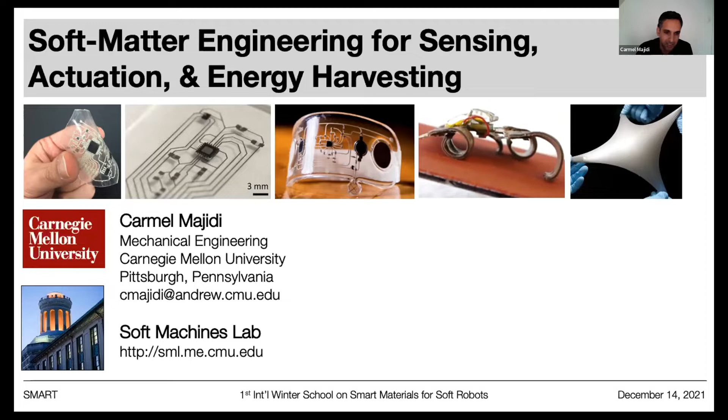First and foremost, I do want to acknowledge my research group, the Soft Machines Lab. Although I won't be spending too much time talking about the work in my lab, I still want to acknowledge all the folks here. This is a pre-pandemic photo - the lab has changed in more ways than one over the last couple of years, and we have some new faces joining the group. But the important thing is that everybody's been able to work together from very different backgrounds. It was a very interdisciplinary group, and that's led to some really exciting collaborations and opportunities.

Just a quick note about Carnegie Mellon. We're in the northeast of the United States, in the city of Pittsburgh. Here's our beautiful campus, situated next to one of the major city parks. Right now we're working out of temporary lab space because our old building got demolished - they're going to be building a new department and lab facility for us. So for the time being we're in this transition stage, but nonetheless we've still been able to stay productive to whatever extent we can over this past period of time during the pandemic.

Just a little bit more about robotics in Pittsburgh more generally. A lot of the exciting things we're seeing within this region have really spun out of work at Carnegie Mellon, and there's a very rich history of robotics at CMU, starting with work, for example, by Marc Raibert on legged robots - basically the platform for the robotic systems at Boston Dynamics. Then there's been a tremendous amount of work with autonomous vehicles, starting with pioneering research using autonomous systems in a nuclear meltdown site, and also with the big DARPA-sponsored challenge in the US for autonomous vehicles, driverless cars, and with humanoid robots, for which CMU has performed well.

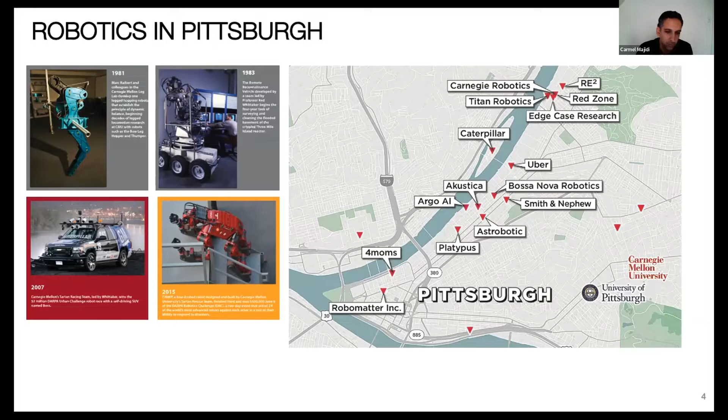Without going through this list in detail, a big thing that stands out is that none of these robotic companies do soft robotics. Soft robotics, although it's gained tremendous attention and made huge impact within academia, is still in its early nascent stages in terms of spinning out into industry and the commercial sector. There have been some really nice highlights - I'll talk about that towards the end of this presentation - on some companies that have been pioneering the use of soft robotics within industry, but there's still tremendous room for opportunity here. Hopefully some of you get inspired to also pursue entrepreneurship and advance some of these material technologies.

Okay, so like I said, there has been really big impact. This is a graphic from a review paper that I was involved in with Elliot Hawkes and Mike Tolley.

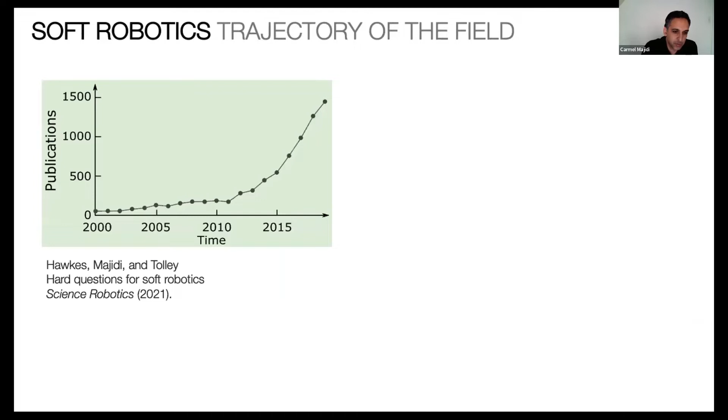By every metric, there's been tremendous interest and growth in recent years in soft robotics, and there's a variety of reasons why. I won't get into all those details, but on the left you see this exponential increase in journal publications, and on the right we see this really impressive rise in

The growth of companies. By the way, just real quick, I have this bar I can't make go away in Zoom that's obscuring the top of my screen. I don't know if on your guys' end you're able to see the title bar, or is it being obscured? Yes, we can see the title, which is Soft Robotics Trajectory of the Field. Oh fantastic, okay great, awesome.

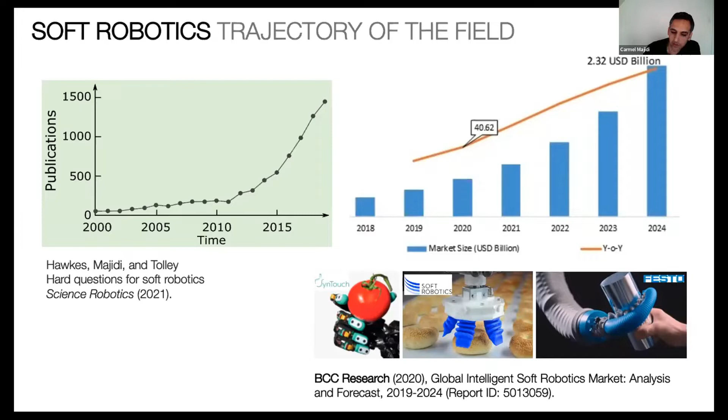So anyways, we'll get back to what this growth means for the field, and also how you can leverage this and take advantage in your own efforts. Before I delve into the main content of this workshop presentation, I do want to make a few high-level comments about basically, are soft robots robots.

I'm not really the best qualified to make this assessment. My PhD training was within a robotics lab, but it's such a broad and diverse field, I don't know that anybody within soft robotics—I'm sure there's a few out there who can probably have much stronger ideas about what they view as a robot versus not. What I can do is reference: in the United States, we have our National Science Foundation, one of the premier funding agencies for academic research, and they do have a clear definition of a robot.

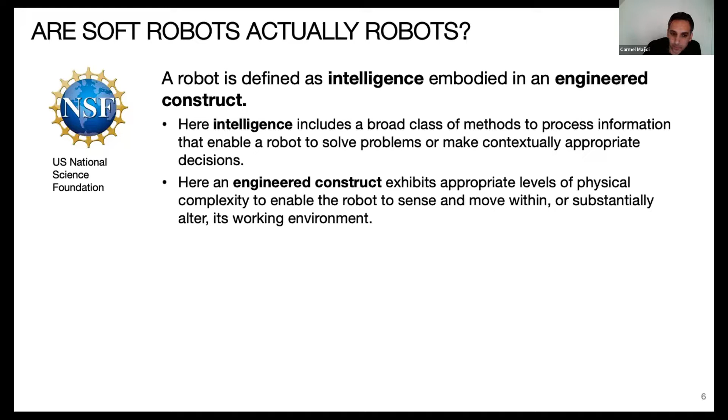What they define a robot to be is basically intelligence embodied in an engineered construct. Intelligence is what you'd expect within a robotics context: the ability to solve problems and make contextually appropriate decisions, process information—so there's a sensing and processing element to it. And the engineered construct relates to the physical embodiment of the robot, its ability to sense and move in an environment, and in some cases alter or perform work on its environment.

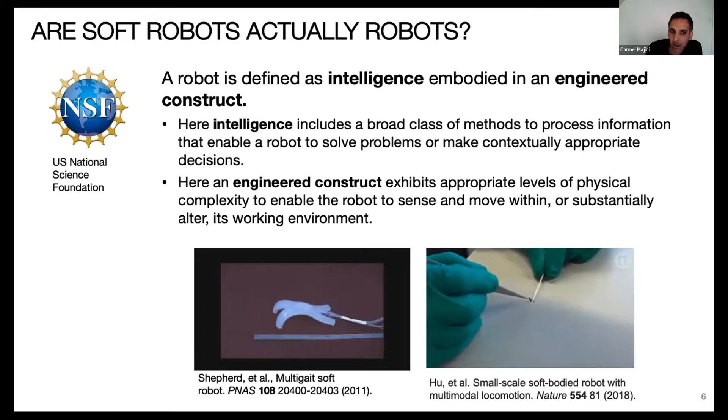It's up to you to decide whether some of the soft robotic systems we've seen within the literature really satisfy this definition of both intelligence and an engineered construct. Certainly these are engineered constructs, and I think they're certainly capable of moving, but the question is, do they satisfy this definition of intelligence?

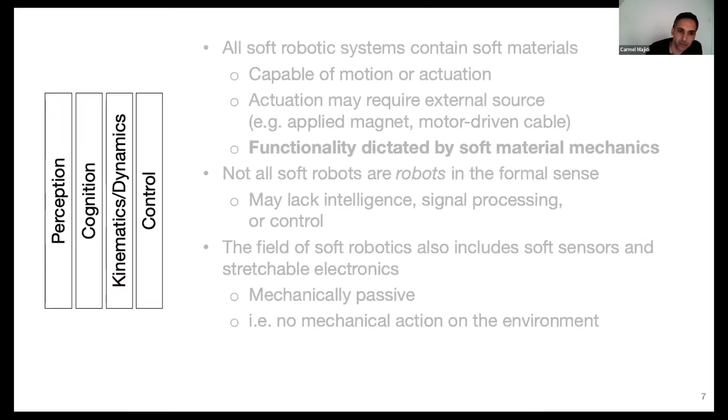Going further, we can think about conventional robotics and the scientific or disciplinary foundations of the field—the different pillars of robotics: perception, cognition, control, kinematics, and of course mechatronics, which features as a very important pillar within the field.

When it comes to soft robotics, a lot of these elements do remain pillars of the field, but there is, of course, this strong emphasis on the use of soft materials. I'd say in bold that a distinguishing feature of soft robotic systems is that functionality is dictated by the mechanics and physics of those soft materials.

I'd go further and say that not all soft robots are robots, at least not in the formal sense as defined by the US National Science Foundation. In some cases they may lack intelligence, they might lack signal processing or the ability for control. You could argue that a lot of that intelligence and control and processing is embodied in the soft material itself and in its ability to deform, and that's a legitimate claim to make. Whether other roboticists would accept that is very much case by case, or depends on the particular subfields.

What I would say though is that there are plenty of embodiments within soft robotics, such as soft sensors and stretchable electronics, that I think we can all agree are not in and of themselves robots. We can call them robotic materials, but these are like stretch circuits that are mechanically passive. They're not performing any mechanical action on the environment, they're not capable of any kind of motion on their own, but they're highly deformable, multifunctional, and capable of other types of electronic and sensing functionality.

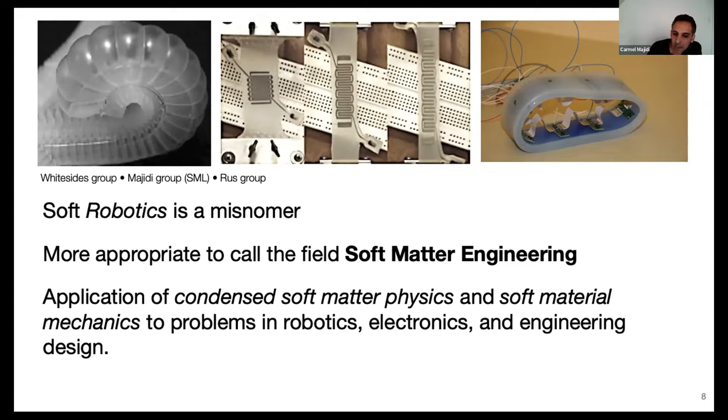I'll talk a little about what I mean by soft matter engineering. It really involves applications of condensed soft matter physics and soft material mechanics to problems in robotics, electronics, and engineering design. So even going beyond more conventional robotics applications or more formal definitions of robotics, it really is engineering applications of condensed soft matter physics.

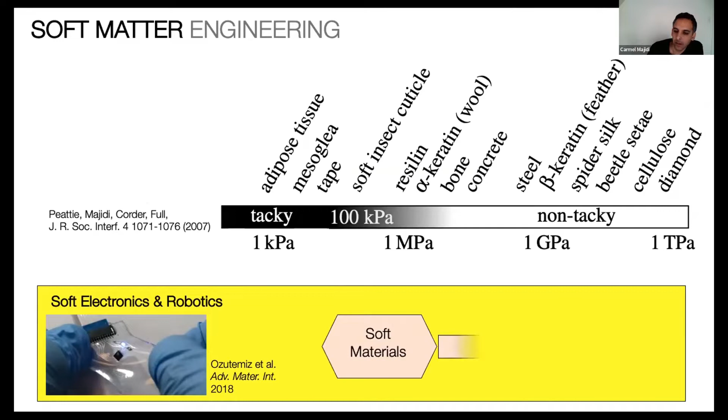Okay, so what do we mean by soft? There's plenty of metrics by which we can distinguish between the stiffness, rigidity, or compliance and softness of a material, Young's modulus being just one of many different types of metrics. At a high level, soft matter engineering is really about taking materials that are on the soft end of the spectrum and integrating them in ways that they exhibit functionalities that we more typically associate with more rigid, stiffer materials.

A challenge with integrating is that inevitably you are going to have cases of mismatches in size, shape, and stiffness of the materials. So something that really stands out in soft matter engineering are the challenges with manufacturing, having these material architectures, systems, and devices that are highly heterogeneous in terms of all the different types of materials that have to be robustly integrated.

Effectively, overall, globally, you would want these systems still to exhibit a lot of the functionalities we see here, right? These are common among soft biological tissue and organisms as well. Ultimately, we want things that are soft and deformable and satisfy a lot of the requirements we need for applications in soft robotics.

Let's see, there's some questions here. Looks like there's a question about what percentage of soft materials make a soft robot? And it looks like Mark Cutkosky talked about selectively soft robots that combine both soft and rigid materials.

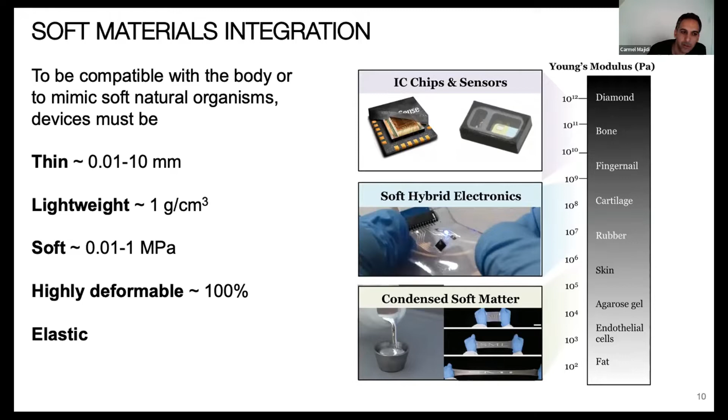What I would say, going back to my earlier definition: I would call it a soft robot if its functionality is primarily dictated by the mechanics of the soft material. If you're using soft materials just for the joints and the rest of the body is piecewise rigid, I wouldn't call that a soft robot.

Yes, the deformation and mechanics of those joints certainly do contribute to the overall kinematics and mobility of the robot, but they're not the primary influence on the mechanics, because those piecewise rigid systems' kinematics and mechanics are also largely governed by the rigid elements as well.

And so you can have soft robotic materials that are incorporated into these hybrid robotic systems. I wouldn't call the full robot implementation a soft robot, but I would say that it incorporates soft robotic elements. I think that speaks to what Mark Cutkosky had been talking about.

I would also recognize that as an important trend within the field of bio-inspired robotics, where we're seeing this broadening of material systems - it's not just all made out of soft materials and fluids and granular matter, but also has a rigid backbone, right? It has a skeleton or rigid elements distributed throughout. So yeah, I would say that incorporates soft robotic materials, but those I wouldn't necessarily call on their own soft robots.

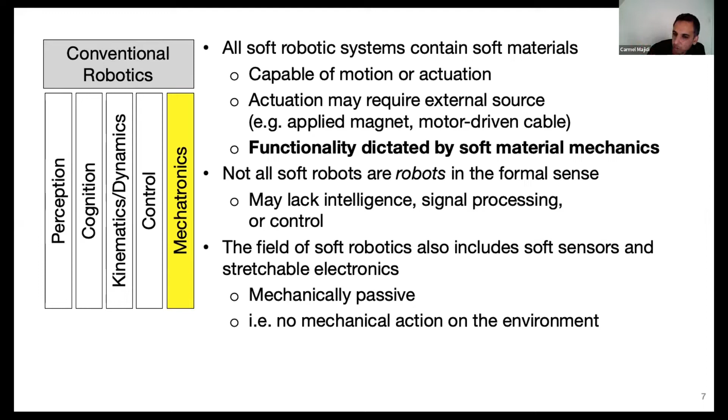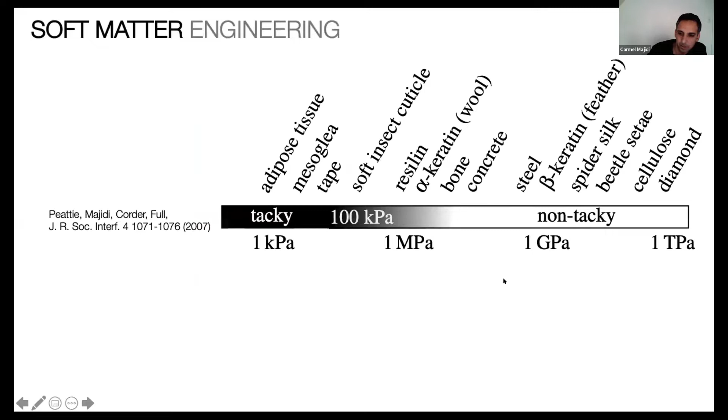So for the agenda, I'll do a quick overview of what I think of as soft robotic materials. Really the core of this is going to be looking at the mechanics and thermodynamics of soft robotic materials. This is going to get into the weeds a bit, into the underlying principles. Apologies in advance if this is either already very familiar to you or you're just not interested in this topic.

I'll also do my best to get through slides on a little bit of the current work in my research group. And then I want to close out by making a few remarks about the prospects for entrepreneurship and commercialization within the field of soft robotics and robotic materials.

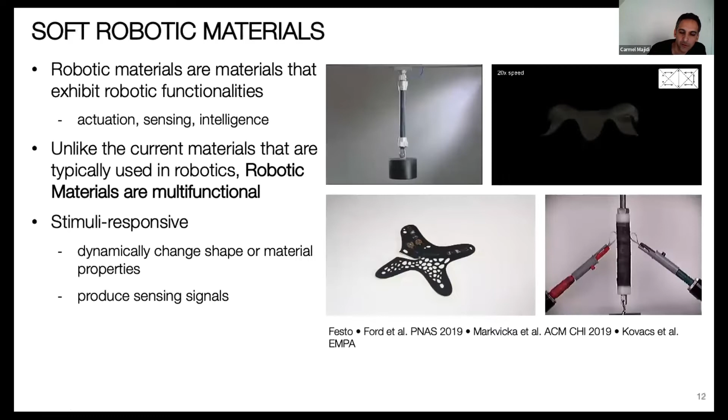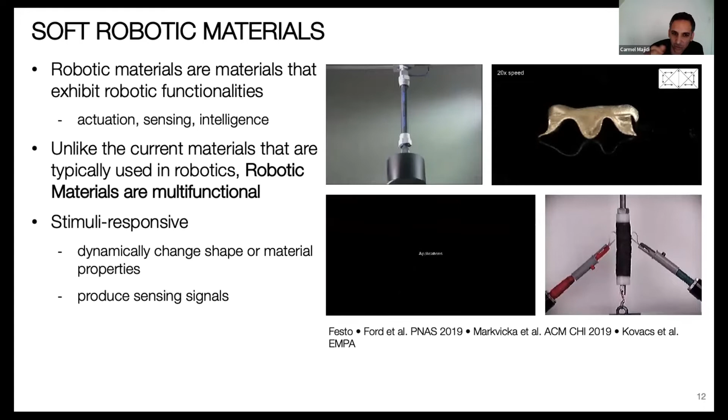Okay, real quick, an overview of soft robotic materials. I'd say that robotic materials, more broadly speaking, at least as treated in the literature, relates to materials that exhibit quote robotic functionality. That's a bit of a circular definition, but by robotic I think we generally know what we mean: materials that are multifunctional, that have the capabilities of actuation, sensing, and/or signal processing and intelligence. This covers everything from stretch circuitry with embedded microprocessors to soft robot tactile skins to all sorts of different types of soft actuators.

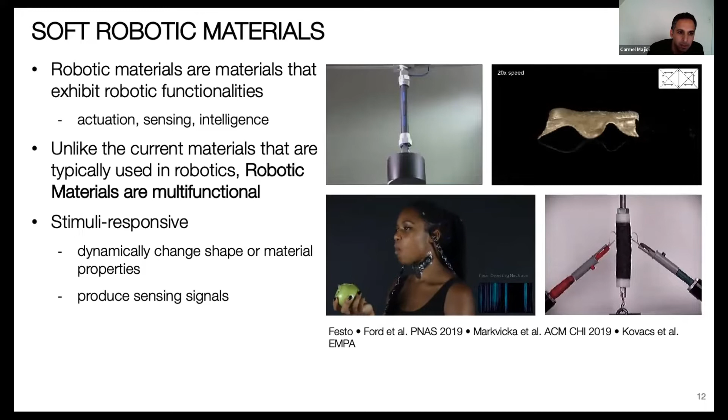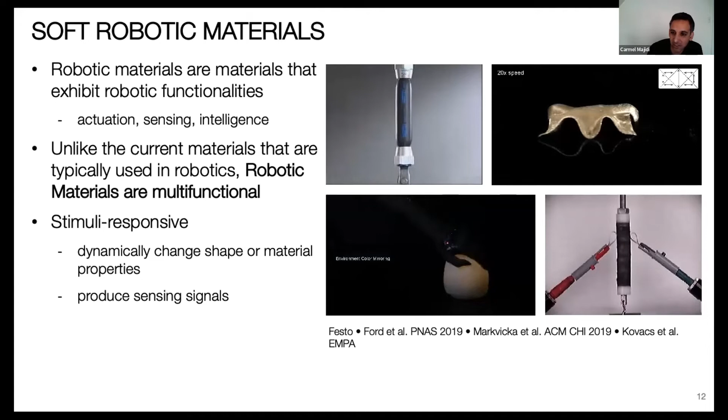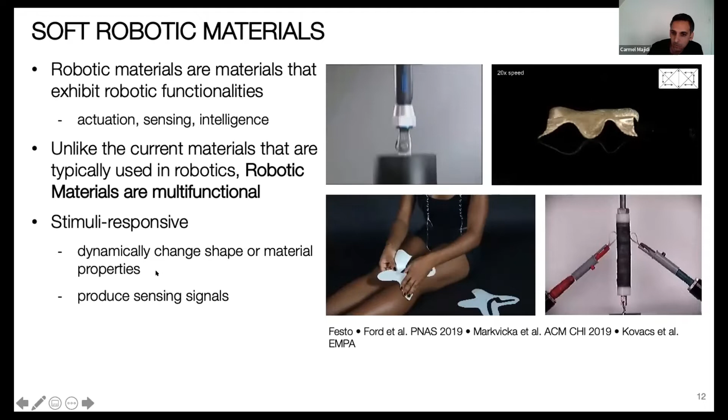This is in contrast to a lot of the more conventional materials used in robotics that are single purpose. They're not multifunctional, in the sense that they're only there to function as a hinge, or as a casing, or as a load-bearing element. Generally what I'd say about soft robotic materials is that they're all stimuli responsive - either actuators that move, change shape, or change stiffness in response to stimuli, or sensors that produce some kind of signal in response to some stimulation or sensor input.

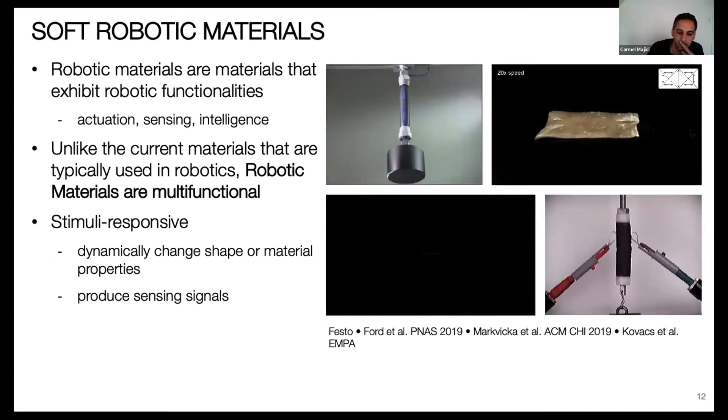A great resource here is this paper by Kaushik Bhattacharya and Dick James in Science, where they argue for a new way of thinking about multifunctional materials, where the material is the machine. This paper came out well before the current interest in soft robotics, and it's been a big source of inspiration to my group.

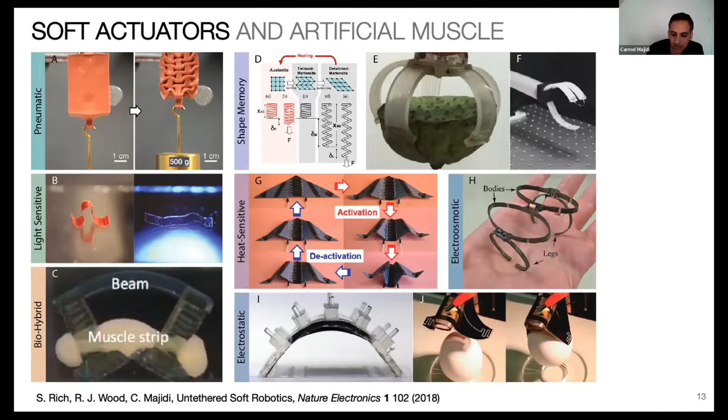This is just a data dump of a variety of different material architectures used in soft actuators and artificial muscle. I'm not going to go through these - you'll probably be familiar with most. Apologies that I don't have the names of all the research groups associated with each of these subfigures, so I'd ask you to reference that review paper at the bottom for more details on the references.

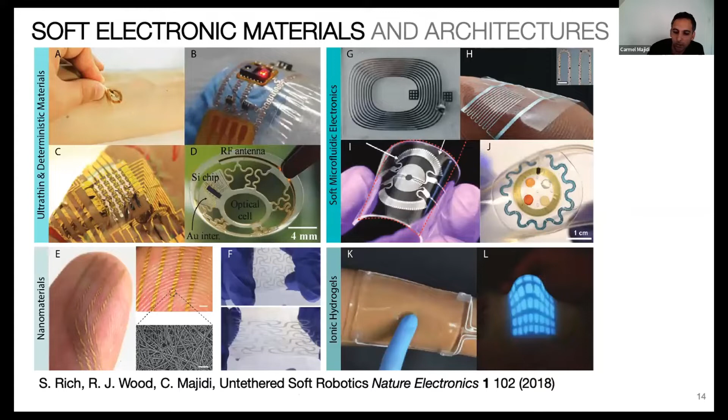Likewise, in soft electronics and sensors, again we see a wide range of different material architectures here. Okay, so...

Thinking about soft matter engineering now as basically a foundation to create these robotic materials, I'd say to think about it holistically - not just about material architectures and compositions, but also manufacturing methods, material synthesis techniques, and also the underlying principles in terms of design and modeling, and the underlying physics of these material systems.

This broader framework of what I'm calling soft matter engineering for robotic materials has its scientific foundations in fields like condensed soft matter physics, material science and chemistry - which I would include polymer science and polymer engineering - thermodynamics and mechanics of materials, which is what I want to focus on for this talk, and also advanced manufacturing techniques, which I would include microfabrication, nanotechnology, and soft lithography.

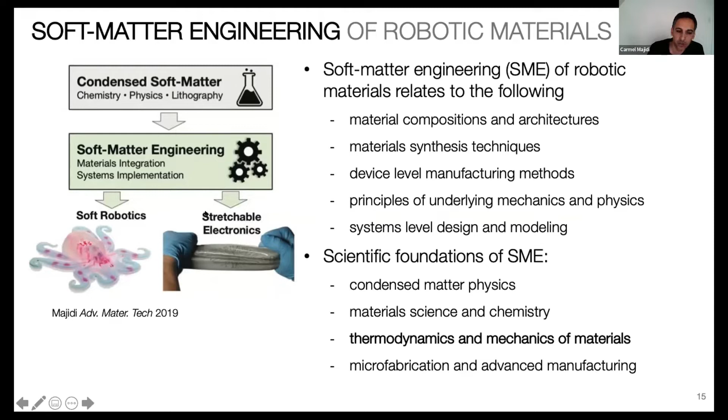So these, in my mind, are the scientific foundations, and really soft matter engineering is a field of applied science where we're applying these scientific principles and methods to applications in stretchable electronics, soft robotics, and other domains related to robotics.

Okay, so what are the types of materials that we typically work with?

A lot of you are familiar with the different types of silicones, rubbers, and elastomers. There's also urethanes, fluoropolymers, and a whole host of other materials typically used. When it comes to elastomers, we can divide them into thermosets and thermoplastics, and the thermoplastics that are really popular in soft robotics are often block copolymers.

When it comes to copolymers, you can engineer these in all sorts of ways. You can graft in functional groups like conductive components such as PANI or PEDOT, and tailor the electrical and thermal properties of these materials.

There's also shape memory polymers out there, materials like liquid crystal elastomer, LCE, that are becoming popular in soft robotics. One common feature is that almost always you see a soft elastomer as the carrier medium, and the elastomer itself could be mechanically passive, or it could have shape memory properties, or be tailored to have various conductivity.

Soft robotic materials also typically have some kind of embedded active matter, and by active matter I mean this very broadly. It could just be the air you pump into a McKibben actuator, a gas, a fluid. It could be granular media used today for particle jamming and stiffness tuning. It could be conductive powder mixed in to create percolating networks for electrical conductivity.

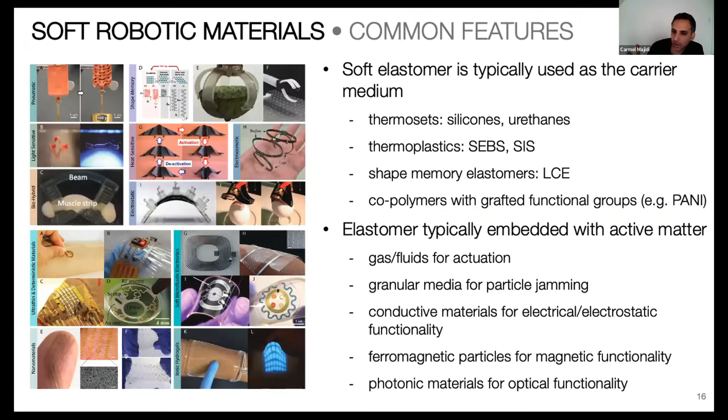So this is at a really high level what I think about when considering the different types of soft matter that go into these robotic materials. In terms of applications, you've been seeing throughout the workshop how these material systems are used for tactile skins, artificial skins, stretchable electronics, and artificial nervous tissue.

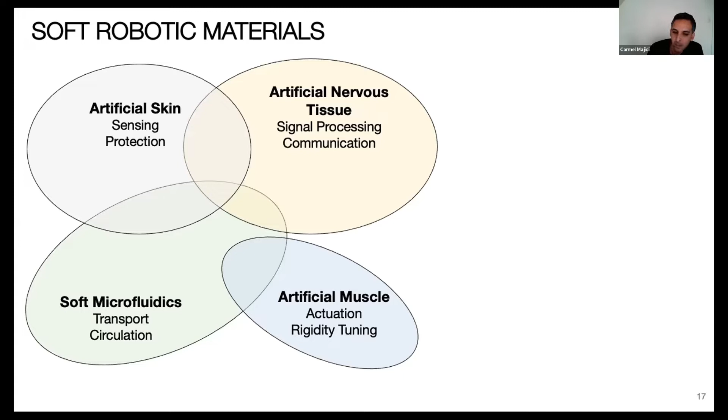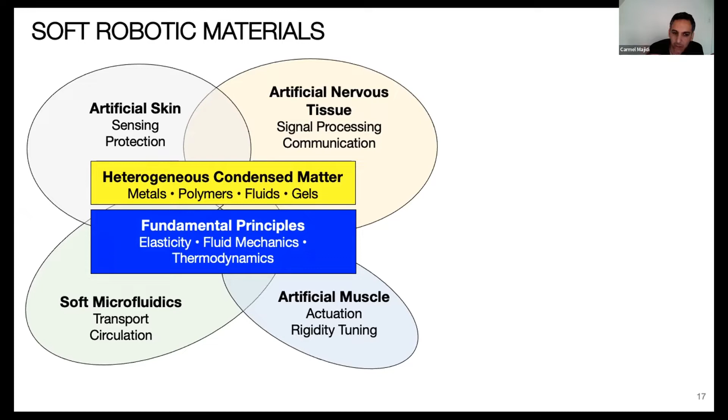There's plenty of exciting uses of soft microfluidics, biohybrid type systems, and soft actuators and artificial muscle. I'd say the common feature in all these application domains is this utilization of heterogeneous combinations of various types of condensed soft matter, and that application of condensed matter physics has a foundation in these various fundamental principles.

So what I want to touch on next is how we use these principles of mechanics and thermodynamics to gain insights into the design and operation of these robotic materials. These principles can be applied to a wide range of material systems, and I'll touch on a few in particular—pneumatics, electrostatics, and ferromagnetics—but they can also be applied to other material systems as well.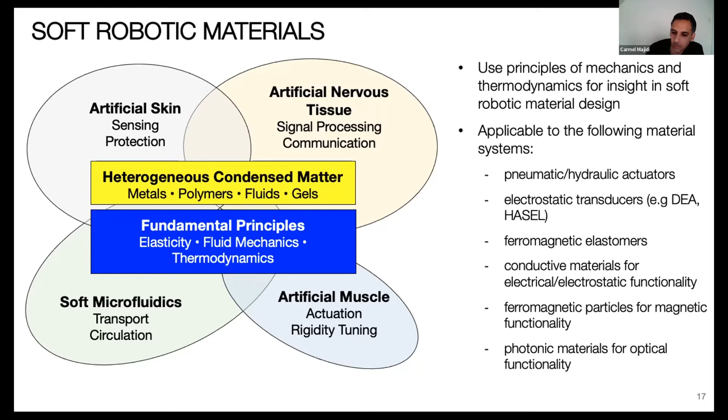Okay, moving on here, and apologies, I'm kind of rushing through these topics. I'm trying to cram a lot in, but really this portion is the heart of the presentation. Fair warning, this may be a little different than some of the other presentations, in that it's going to be almost lecture style—this is adapted from content I teach in some graduate level classes on soft robotics and mechanics of soft systems at CMU.

All right, so going back to how materials are presently used in robotics more generally—there's a wide range of different engineering materials, and we can classify them based on their stress-strain behaviors.

There's of course the stiffer plastics and metals that are the load-bearing elements or used as housing in robotic systems, and they tend to have a very steep curve when plotting stress versus strain. At the other end of the spectrum, we have softer materials like these elastomers that have a much more shallow slope and can allow for much higher strains.

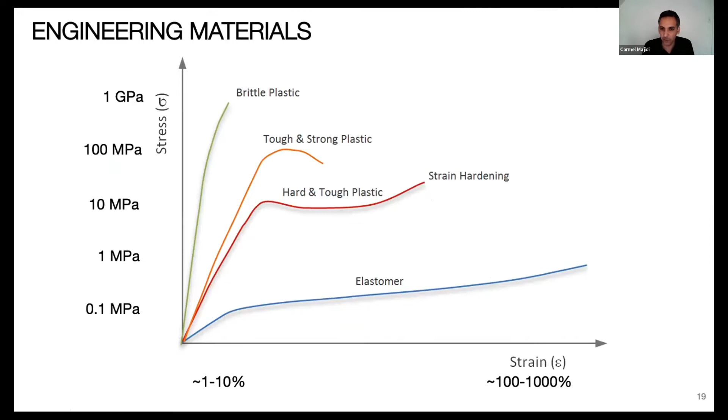Okay, so that gives a fairly wide picture of the different types of materials. If you wanted to distill things down to one metric, when comparing the softness or stiffness of these materials, there's Young's modulus, which scales with the amount of force or stress it takes to strain a material. I find that a very useful metric for comparing softness. In soft robotics, typically we work with materials that have a modulus on the order of hundreds of kilopascals, at most maybe a few megapascals. These are materials that are fairly elastic, and can be strained anywhere from 100 to 1,000%.

Going back to the earlier question about hybrid systems mixing soft materials with rigid materials, by my definition, for the whole thing to be called a soft robot, the overall system effectively has to have this degree of compliance and deformability. Otherwise, it's just a robotic system that has soft robotic components within it.

Another metric sometimes used to talk about the hardness or softness of a material is shore hardness. There are actually different standards for shore hardness - I'm not going to go into the details here. I just generally find this a much more confusing way to represent the stiffness of a material. But unfortunately, if you look at data sheets from distributors and suppliers of engineering materials, instead of reporting Young's modulus, they'll report a shore hardness, and sometimes they won't even tell you what the specific standard is, so you have to infer that on your own based on context.

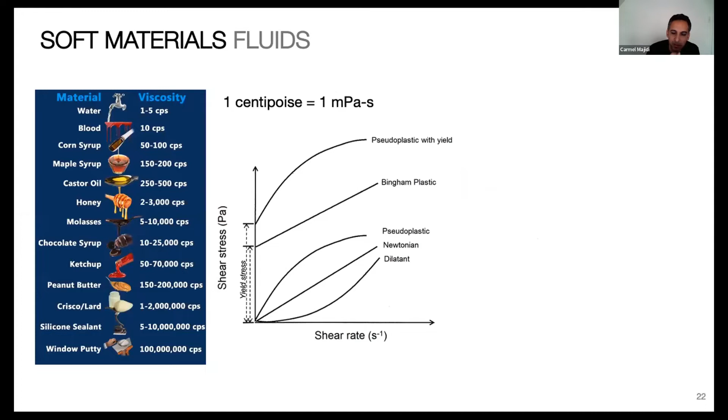So I've been talking about elastomers and kind of solids, but in soft robotics, we also care a lot about fluids. For that, instead of using Young's modulus or shore hardness, we talk about viscosity and different features of the rheology of these materials. There's certainly a very prominent role for different types of fluids in soft robotics.

So here's just one example on the top of a liquid metal alloy that's kind of commonly used for soft skins and stretchable electronics.

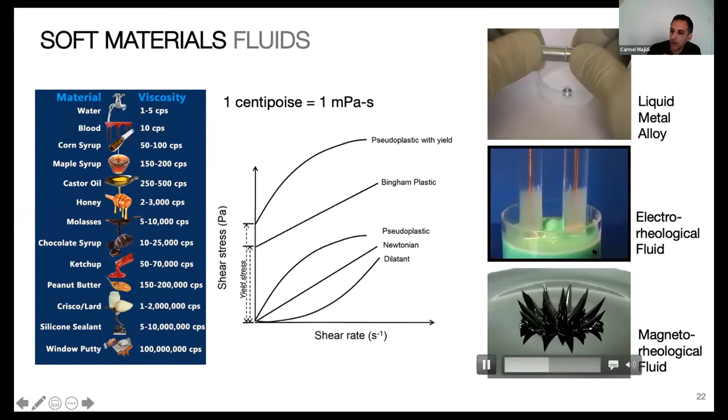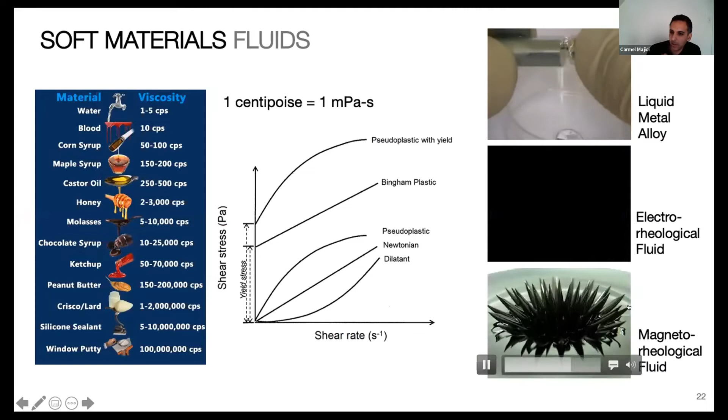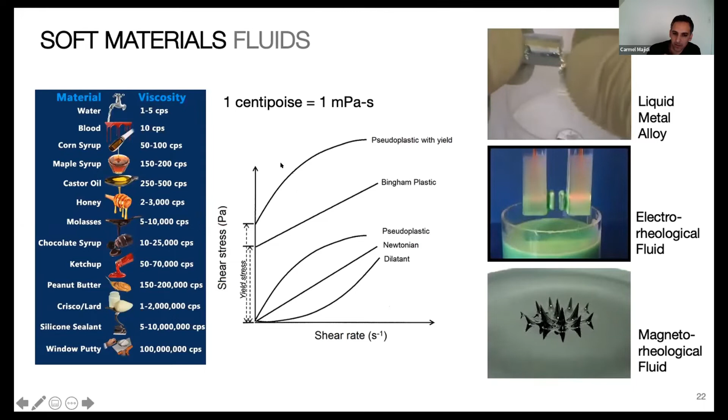I haven't seen as much work within soft robotics, but there's been decades of research on electrorheological fluids and magnetorheological fluids that have these phase-changing and stiffness-tuning properties in response to either electrical stimulation or magnetic field. Ultimately, you can model and evaluate the rheology of these materials in the context of these typical behaviors, looking at the shear stress of the material as a function of shear rate.

Okay, so going back to soft robotic materials and really delving now into the heart of this workshop—we're like 30 minutes in, and I'm finally getting to the main point here—is that for virtually any, in principle for any soft robotic material system, we can always examine the mechanics and physics from a thermodynamic standpoint.

We can always define a Gibbs free energy of the system, and we know that the Gibbs free energy is going to be subject to the first and second laws of thermodynamics. So for a lot of these material systems, the Gibbs free energy is going to be related to the Helmholtz free energy and also the mechanical work associated with that system.

When it comes to Helmholtz free energy, there's going to be an internal chemical bonding energy component, or just an internal energy component. And then there's also going to be a system entropy component to Helmholtz.

With mechanical work, this can come from a lot of different sources. It could come from external loading, like a dead load, but that mechanical work can also come from internal air pressure, or from the Maxwell stresses induced by electrostatic charge, or from body forces from gravity or from electromagnetic fields. So this mechanical work can be a lot more than just surface tractions and mechanical forces—it can come from other sources as well.

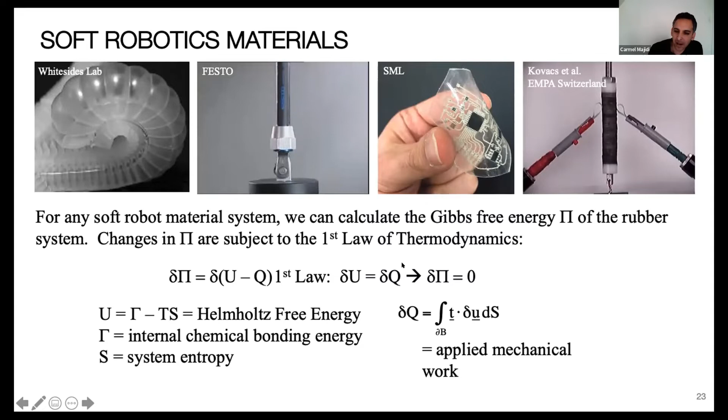Okay, so what we know from the first law is that in a closed system, the Gibbs free energy remains stationary. So we have energy conserved within our system, and knowing that the two main contributions are work and Helmholtz free energy, what that means is that any change in Helmholtz free energy has to be balanced by a corresponding change in mechanical work performed on the system.

Okay, so that principle of stationary potential is represented here when we look at the Gibbs free energy as a function of whatever variable we're defining as the state of the system. So if we're looking at our soft robotic system and how the radius, the inflation diameter, changes, then that would be the independent variable here that can change.

Or maybe it's the length of elongation of our actuator, or maybe it's the amount of charge stored within our electrostatic transducer. Regardless of what that independent state variable is, we can always come up with this plot or manifold of potential energy as a function of those independent variables. And what we find from the first law of thermodynamics is that the slope has to be zero at static equilibrium—the potential energy has to be stationary. So basically that's another way of saying that energy is conserved.

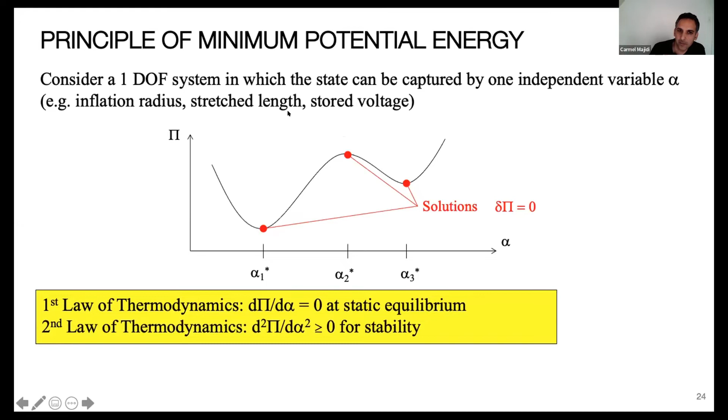The second law of thermodynamics, which relates to entropy in our system, dictates that the Gibbs free energy has to be minimized, so the second derivative of that potential energy has to be greater than or equal to zero. I call this the principle of minimum potential energy, because within mechanics and soft robotics, instead of calling it Gibbs free energy, we call it potential energy of the system.

What I just showed is for a single, one degree of freedom system, but this could just as well be applied to multi-degree of freedom systems, where you have length, radius, wall thickness, voltage, and a bunch of different variables that can independently vary. In those cases, you have to make sure that our Gibbs free energy is minimized with respect to all of those different variables.

Sometimes the variables could not be scalars, but could be functions or tensors. Your unknown variable could be the strain field throughout the entire material, or it could be the electric field or electric displacement. In those cases, it's not just one scalar value like a length, it's going to be strain - an infinite number of strain values at all the different points within your elastic body.

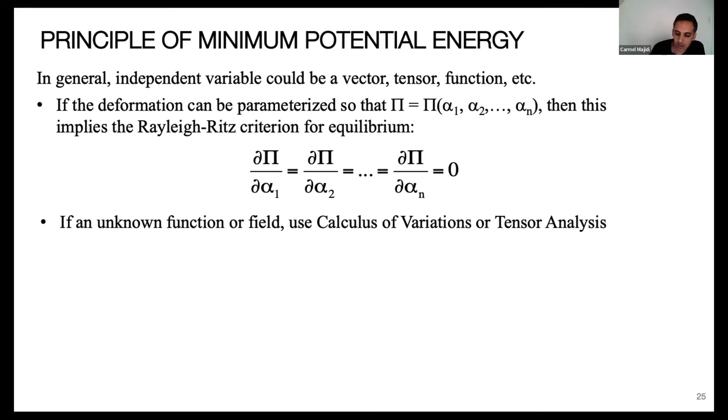For that, instead of using this Rayleigh-Ritz formulation, we have to use calculus of variations in the case of scalar functions, and more generally tensor analysis and differential geometry when it comes to vectors and tensors that are free variables. So what I'm going to show is how these variational principles can be applied to a variety of problems in soft robotics. I'll just very quickly touch on these two different cases.

Starting with how we can go from the first and second laws of thermodynamics to deriving a constitutive model for a hyperelastic solid. Then, using these same techniques, we can see that they can be applied to McKibben actuators, dielectric elastomer actuators, and also looking at ferromagnetic systems.

This is really what I advocate above anything else: if you want to study the mechanics and physics of soft robotic systems, use these energy minimization techniques. Don't waste your time with stress strain approaches or other methods. I'd even say don't waste your time with finite element analysis unless you know specifically what that design is, what all the dimensions are, and what all the materials are - in those cases, sure, plug things into FEA and get your solution that way. But if you're still in the early stages of design and don't know the dimensions, geometry, or materials, use these energy principles to get a back-of-the-envelope ballpark intuition for what the important governing physics of your system are.

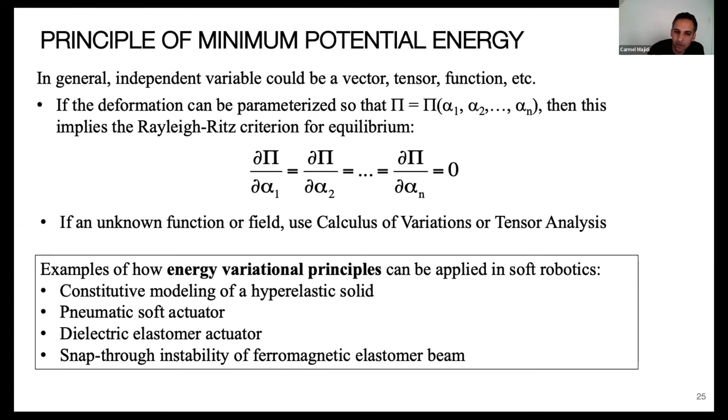So when it comes to hyperelasticity, how do these energy principles play out? Let's just look at the most popular material in soft robotics - let's take a look at silicone, or more specifically polydimethyl siloxane, these platinum cured silicones.

They have all sorts of different brand names, everything from Sylgard 184 to all the EcoFlex products - at least in the States we have the company Smooth-On, plus all sorts of different vendors and suppliers and different molecular weight ratios, cross-linking densities, additives, and all that stuff.

But basically the underlying principle here is the same: we have this loose network of polysiloxane chains. Each of these polysiloxane chains is composed of siloxane monomers, and these units within our polymer chain can, we assume, freely rotate with respect to each other. Periodically we have these covalent bonds, these cross-links that connect adjacent chains, and it's really those cross-links between the chains that give the rubber its material elastic integrity.

What makes it resistant to mechanical deformation is actually a very interesting principle that's really steeped in the entropy of these material systems. So it does go back to this representation in terms of a Helmholtz free energy and a Gibbs free energy for the system.

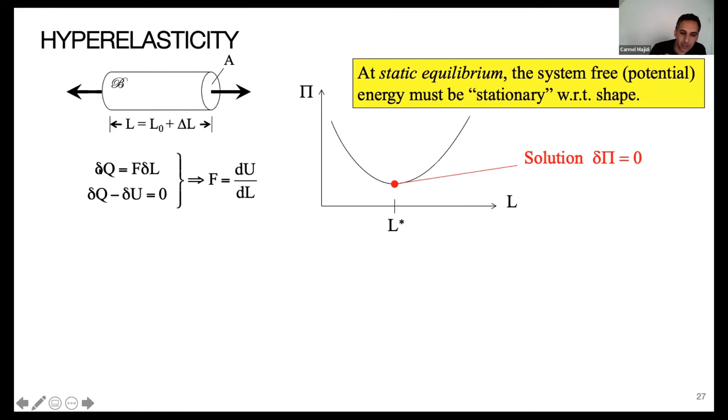And then to basically get the force required to stretch the material, we go back to that energy balance to relate mechanical work to the corresponding change in Helmholtz free energy.

Assuming that the covalent bonds within our polymer aren't really stressed that much and maintain the same length, the deformation of these soft material systems is largely governed by the unwinding or uncoiling of these polymer chains, or the rotation of adjacent monomers. In that case, the change in Helmholtz free energy just corresponds to the change in entropy of the system.

When we think about entropy, again we think about all the different possible configurations that each macromolecular chain, each polymer chain, can adopt. Boltzmann's constant factors into this as well for getting that entropy. And then when we look at what is the entropy, what are all those different possible configurations, for that we turn to statistical mechanics.

From that, we can get this simple expression that relates entropy with the overall volume of material that we have, with X, Y, and Z dimensions. It also has values like the total number of polymer chains, Boltzmann's constant, the root mean squared average of the end-to-end distance of an average chain, and this value M naught, which corresponds to the number of possible configurations a chain could have in the special case when the two ends are touching each other.

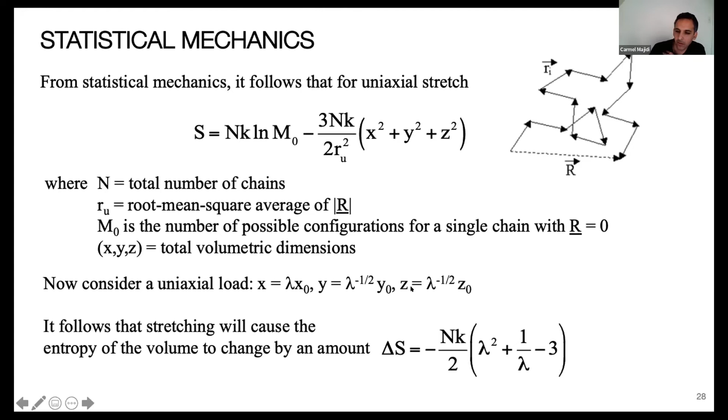Based on that, we end up with this kind of representation. If we now take this volume and deform it, we can relate those dimensions, the X, Y, Z components of the volume, with stretch. In the case of uniaxial loading, we stretch along the X direction, which means we have to contract along the Y and Z. We get the corresponding change in entropy, plug this back into our energy balance.

That gives us a relationship between force and stretch that turns out to have a form that looks like our familiar expression for a neo-Hookean solid. So this is the foundation of hyperelasticity, all originating from principles of thermodynamics and statistical mechanics, where we have this coefficient of elasticity C1 that's related to all these intrinsic properties of our polymer.

We can take this and generalize it. This is just a very simple application of statistical mechanics, and we can make this fancier. There's the Arruda-Boyce model that Mary Boyce and Ellen Arruda developed, which takes a similar approach but ends up with a much more accurate constitutive model for stress versus strain, or stress versus stretch.

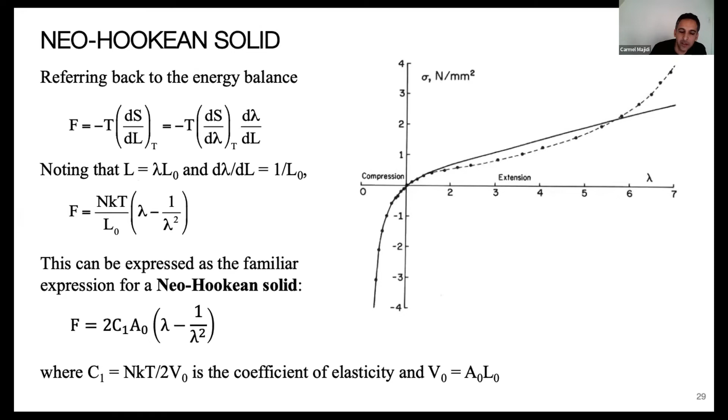What's also significant is that from that entropy we get our Helmholtz free energy, and from the Helmholtz free energy we get our elastic strain energy density, which sometimes appears as W in the literature. So now, empowered with this value, we can do all of these robotic systems and come up with an expression for our Gibbs free energy.

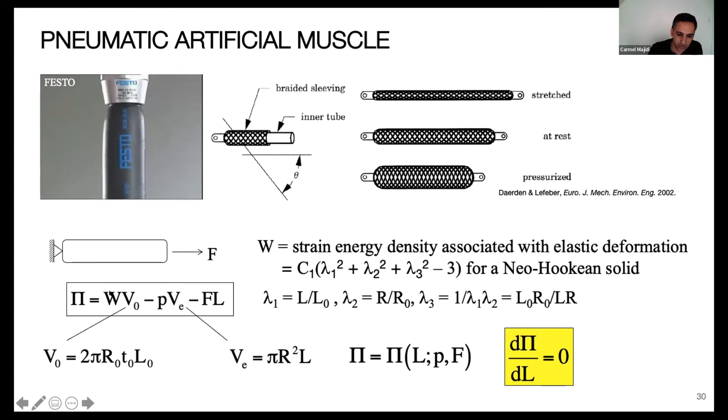In the case of a pneumatic artificial muscle, we again have the entropy of the rubber captured here by the strain energy W. Again we see that C1 constant, we see the stretch components factor in. And then we also have the mechanical work terms, which was the other important component in our potential energy. Here we have the mechanical work of that applied dead load, given by F times L, and we also have the mechanical work associated with all that internal air pressure.

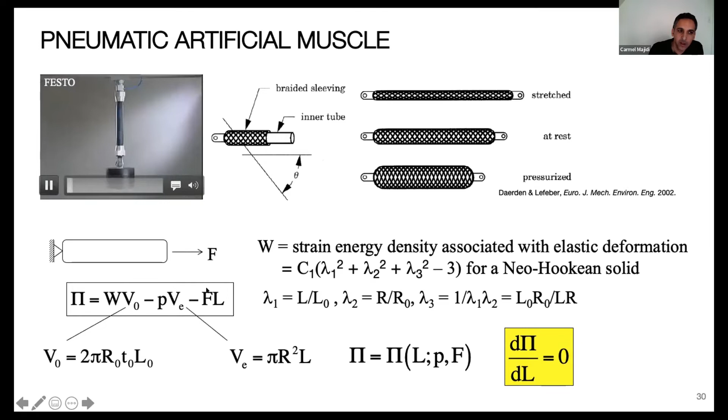So when we minimize our potential energy with respect to the overall length of our actuator, we end up with solutions that turn out to be in very good agreement with what we observe experimentally with these types of McKibben actuators. Just in interest of time, I'm going to speed through this.

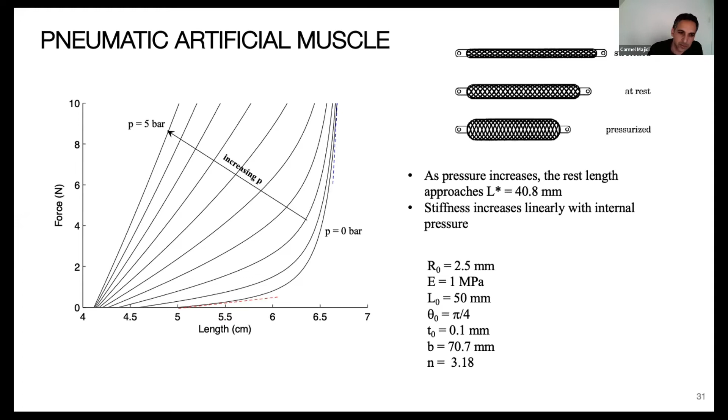Same goes with dielectric elastomers. Here again we have an elastic material, so we have our strain energy density that we plug into our Gibbs free energy. Instead of mechanical work associated with an internal air pressure, we have mechanical work associated with electrostatic pressure, sometimes called the Maxwell stress. The way that's reflected in the Gibbs free energy is a term known as the electrical enthalpy.

Something I'm kind of hand-waving here is that these different terms in our Gibbs free energy, depending on what we select as our input variable versus the independent output variable, influence how we define the different contributions of mechanical work. As we switch those variables, we perform what's called a Legendre transformation to update those contributions. So when it comes to electrostatics, sometimes the electrical enthalpy is replaced with a different electrostatic energy term, which happens if instead of voltage control we operate with charge control. That just arises from the Legendre transformation.

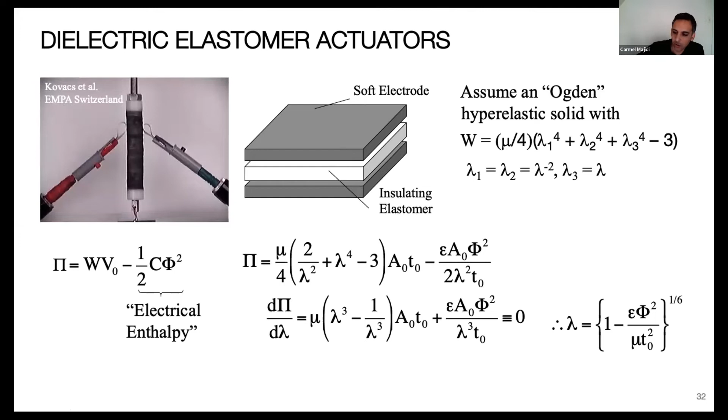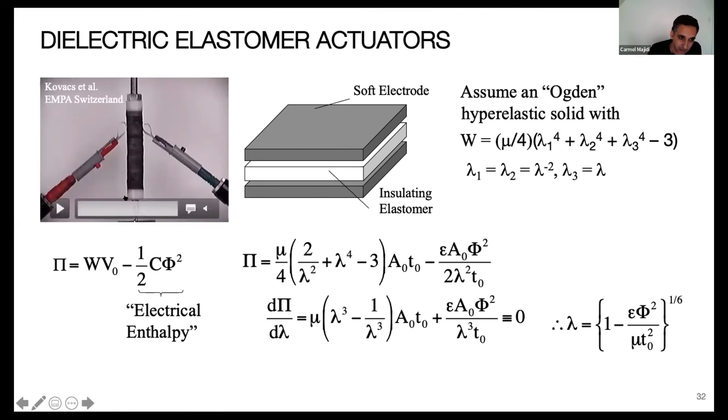Regardless, that's just a side point. Again, same principles as before: we have our Gibbs free energy, and now we minimize with respect to our independent variable, which in this case could be length or the longitudinal stretch lambda. When we do that, we get a result that's in fairly good agreement with what we typically see experimentally. Another outcome of this is that we see instability within dielectric elastomer actuators. This is anticipated by our thermodynamic formulation, and it's also something we see experimentally.

Here's a case of a dielectric elastomer actuator where at some point you see this electromechanical instability that results in dielectric breakdown of the material. You'll see that little spark there in the corner - I'll play that again so you can see it. That arises from this instability: as we apply voltage and our actuator starts to contract, that contraction results in a greater internal electric field, which results in more contraction, and you end up with a positive feedback loop that squishes the rubber so much it eventually undergoes electrical breakdown.

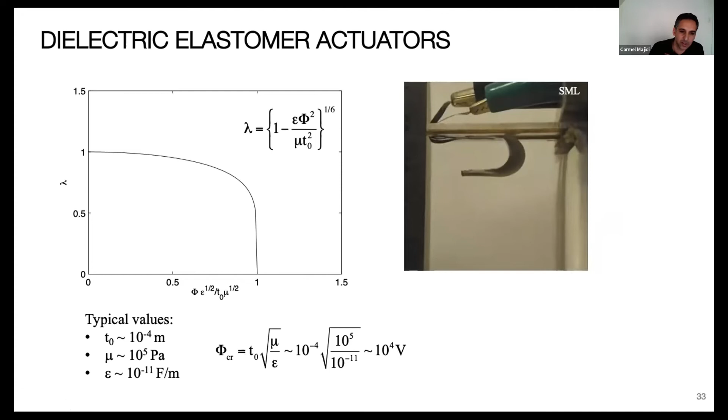Last quick example here is ferromagnetic elastomers. This is actually an example of work from my lab, by Vivek Ramachandran, a former grad student in my group, looking at the snap-through instability of these ferromagnetic elastomers. The rubber has ferromagnetic particles in it that are attracted to an external magnet. As we bring this magnet closer and closer, that magnetic force gets larger and larger, and at some point it overcomes the elastic restoring forces in the rubber and causes a snap-through instability.

Again we can examine this using the exact same techniques as before. We have this Gibbs free energy, with again an elastic term. Here we also have mechanical work associated with gravity, because these magnetic rubbers are fairly dense and get weighed down a little bit. And then we also have a work term associated with the potential from that electromagnetic field - that magnetic force exerts a body force on the rubber, which is incorporated into our Gibbs free energy as well.

Again, same as before, we minimize to get the state of the system at static equilibrium. Snap-through instabilities occur when we have an instability, when we violate the second law of thermodynamics. That occurs when the second derivative of potential energy with respect to our amplitude is less than zero. So to avoid that snap-through, to maintain a stable state, we have to make sure the potential energy has positive curvature. But if the magnet gets too close, we hit some critical distance at which that condition no longer applies and the snap-through instability occurs.

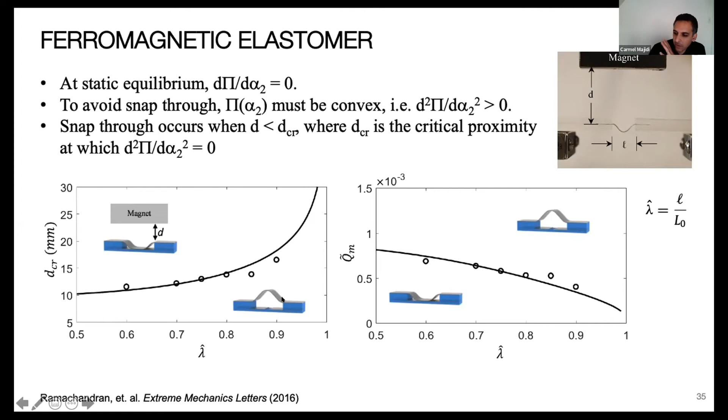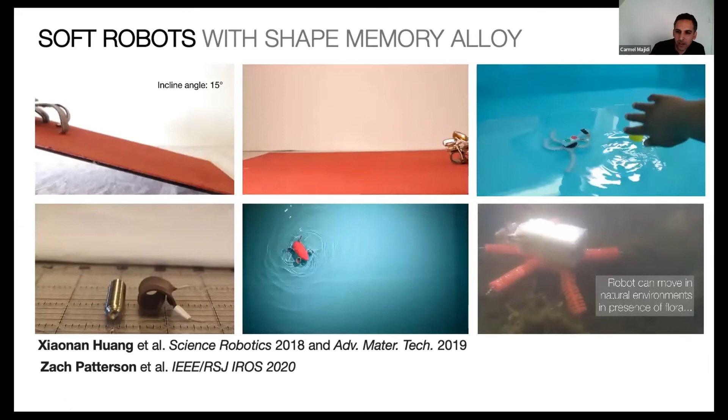I'm going to try to play simultaneously, for the most part, untethered soft robots that are powered using shape memory alloys. We're doing a lot of modeling, simulation, and closed loop control of these systems, and investigations of path planning. Some of this is model based, some is using learning based schemes. So this is one set of projects in my group, happy to chat about it a little bit later.

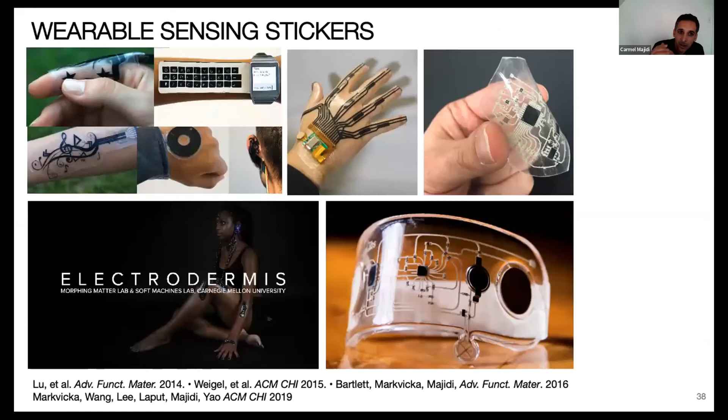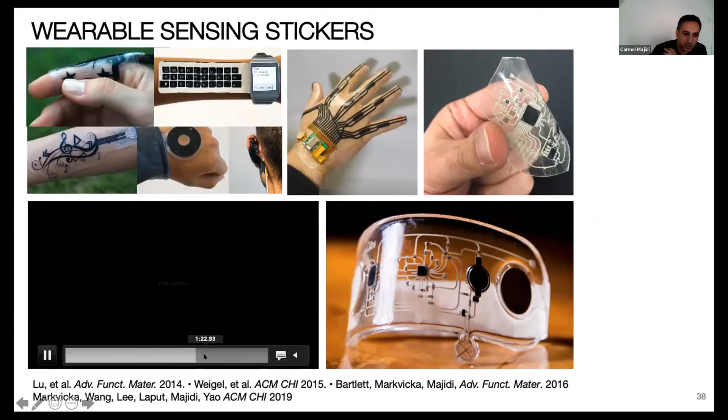Another thrust of my lab are these wireless and wearable sensing skins, these kind of sticker-like architectures for health monitoring and physiological sensing, using all sorts of different types of stretchy circuits.

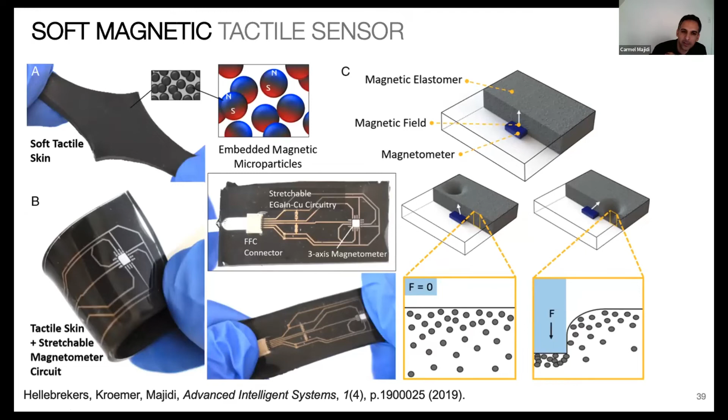We also do quite a lot of work with liquid metal. So here's examples of using liquid metal as electronic skins with different types of embedded microelectronic chips for sensing and signal processing, using that in these different types of soft robotic systems.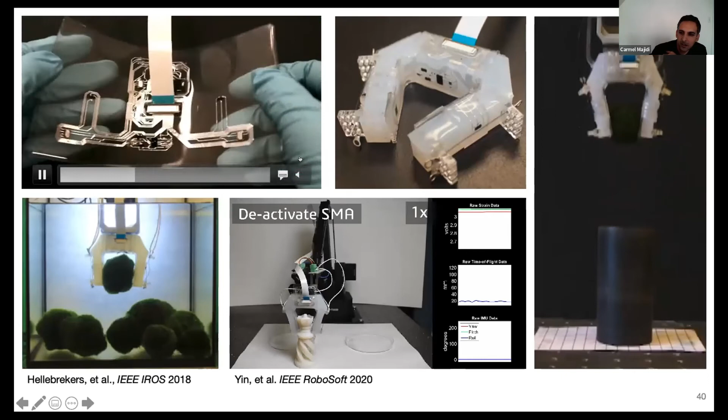And also just creating multifunctional rubber composites where we use liquid metal and other types of materials to tailor their electrical, thermal, and shape memory properties. So I'll just quickly speed through this.

These material systems have all sorts of very robust mechanical properties. So not only are they soft and stretchable, but in some cases they have mechanical and electrical self-healing properties.

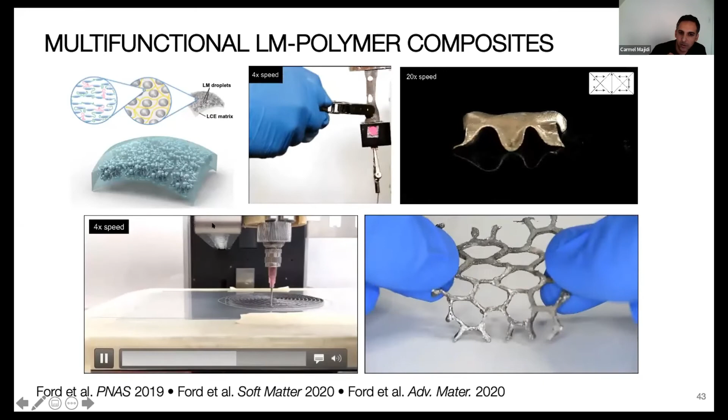Sorry for this. But just more examples of combining liquid metal with materials that allow for 3D printing, and then in the case of liquid metal combined with liquid crystal elastomer.

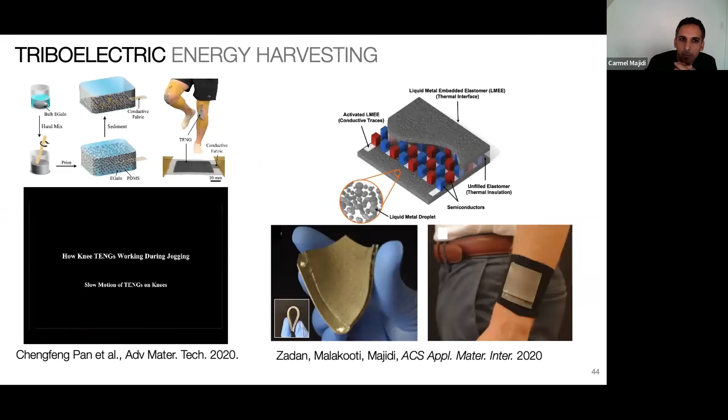And lastly, we've been also doing a lot of work with applying these material systems for energy harvesting applications, whether it's triboelectric, generating energy from body motion, or thermoelectric, generating electricity from body heat.

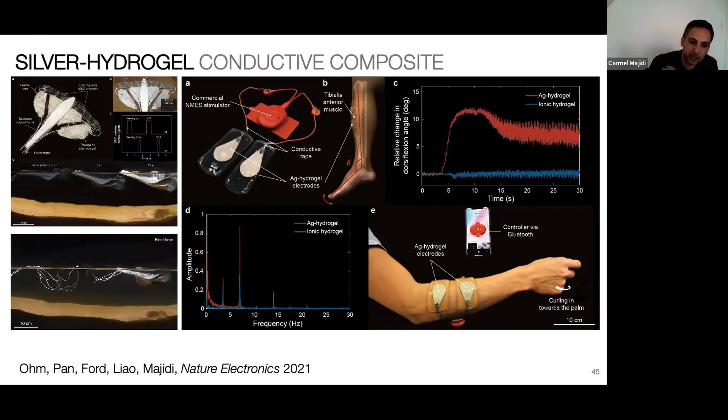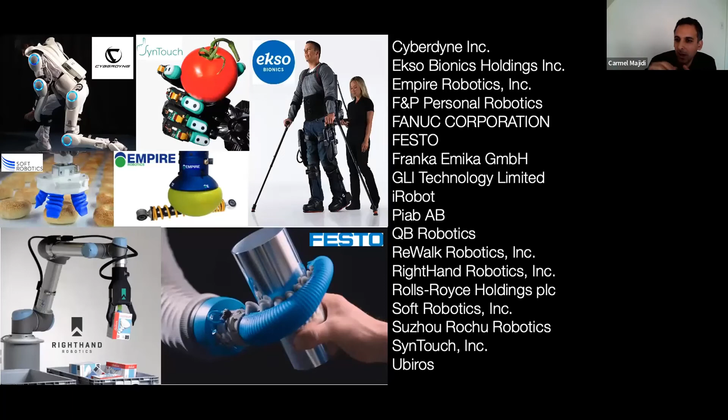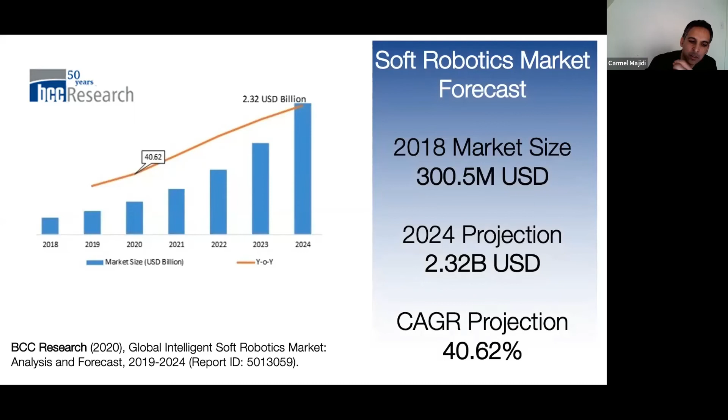A lot of these are just high-level thoughts, but to reemphasize, there has been a lot of exciting progress lately in companies that are commercializing a lot of these soft material architectures and using them in a variety of practical applications. And so we are seeing a tremendous amount of market growth within this field, and this is soon poised to be a multi-billion dollar industry. That growth will hopefully continue, and it will hopefully eventually become an important segment or subsegment within the field of robotics.

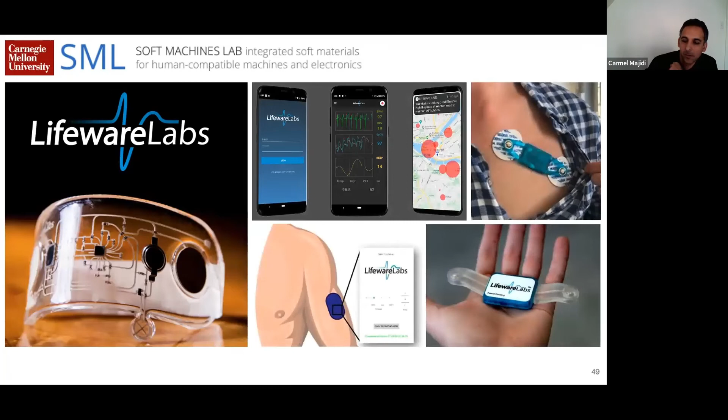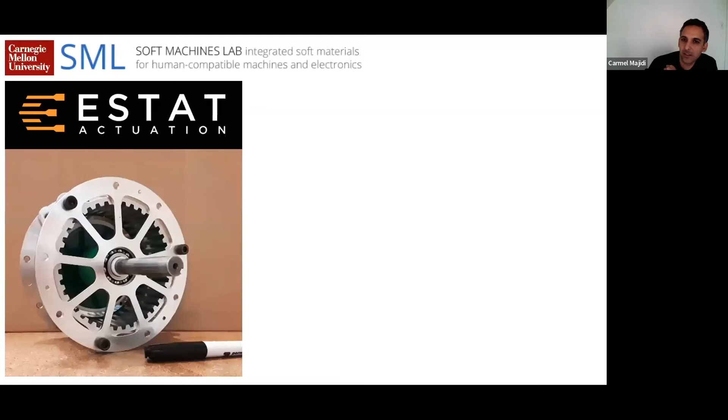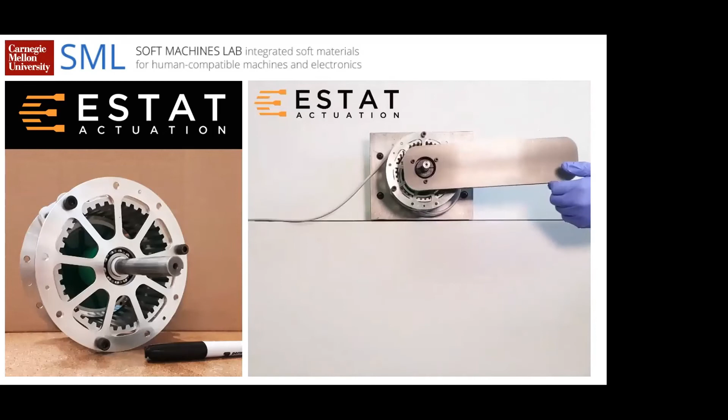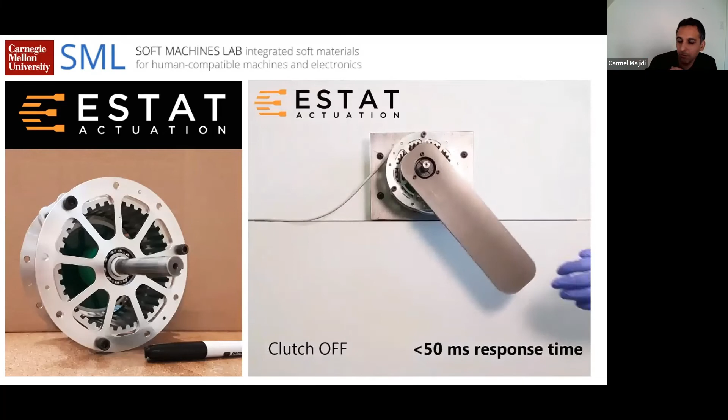But just more generally speaking, what I've learned through launching these various startups from my group in partnership with my former PhDs and postdocs is that soft robotics, at the end of the day, we're talking for the most part about hardware technologies. There's a big algorithmic element to a lot of these implementations, but at the end of the day, we're talking about novel material architectures.

As a hardware company, we have to deal with the difficult task of getting these material systems qualified. We don't have the luxury of just rolling out some software and learning on the fly, putting a product there that's not maybe perfect and can get reiterated as it's used. For a lot of these customers, they want to be guaranteed that these material systems are going to work every single time within their products, and so that pipeline for qualification does take quite a number of years. It involves all of these different steps in terms of efficacy, repeatability, and manufacturing scalability.

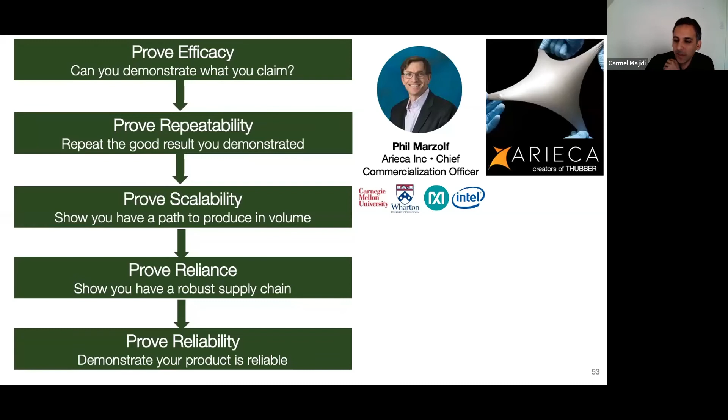And once you have the manufactured, or mass manufactured, product, is it resilient? Is it reliable? Is your supply chain reliable as well? Are you guaranteed that you're going to still be able to count on all those raw material suppliers to provide you with the materials you need for your product?

And so you end up with this chicken and egg dilemma. You can't really get any revenue from customers until you've gone through the entire pipeline I just talked about. But you can't get that kind of product qualification, you can't get through that pipeline, until you have investment and funds in the company. And unfortunately, or perversely, you can't get investment until you have revenue, in a lot of cases.

So there are solutions out there that I'm more than happy to chat about offline, in terms of ways that you can overcome that chicken and egg dilemma with launching a startup. These have been recipes of success for a lot of startup companies that I've seen, so more than happy to talk about these.